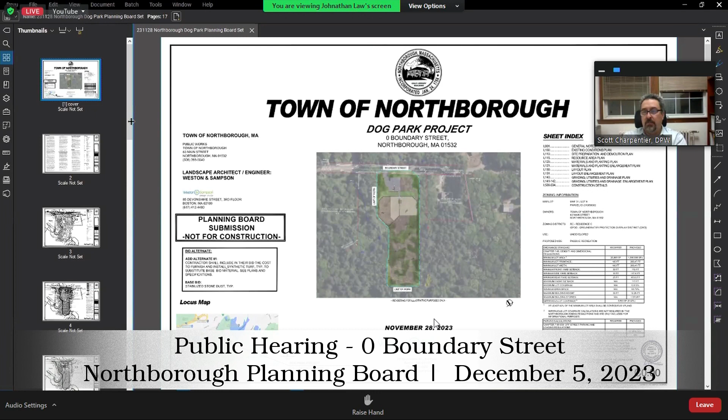I'm Scott Charpentier, Public Works Director, Northborough. We have a proposed dog park project that's being funded through the Community Preservation Act funds. The dog park location is on Boundary Street. The street is actually owned by Marlboro, but the property itself is located in the town of Northborough and owned by the town of Northborough.

If you drive down Hudson Street and take a right onto Boundary Street, just as you're approaching the Marlboro wastewater treatment plant, on the right-hand side there is a walking trail with a dirt parking lot that people use. Just past that on the right is the location of the dog park. If you see a duplex beyond that, you've gone too far.

We did a siting analysis about a year and a half ago, looking at different locations in and around town. This was decided upon as the preferred location through a public input process. At that point, we engaged Weston and Sampson to move forward with site analysis and design services. The dog park has been submitted to the Stanton Foundation for grant funding consideration. There are certain criteria in that grant program—Lori's more familiar with it than I am, having successfully been awarded that grant in the past.

Some of those components are that there is water available for the dogs, it's ADA accessible, and there are large and small dog areas among other requirements. So this project has large dog and small dog areas. There is a paved parking lot with 10 parking spaces, including a van accessible handicap space, and an overflow area that'll be gravel or millings, also used for snow storage.

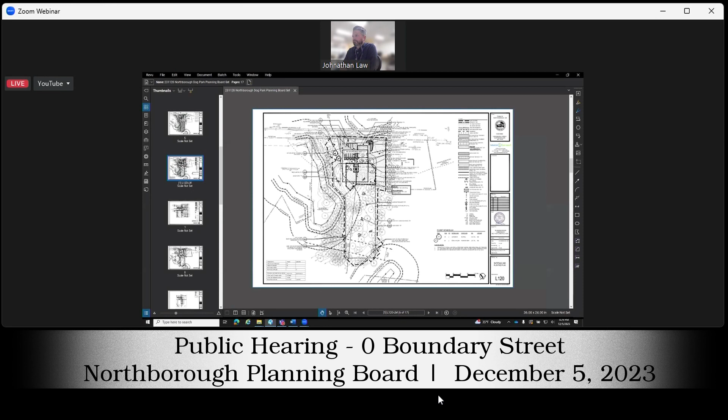Other questions? Hours of operation - I only saw hours for construction, but are there hours of operation for the park? I believe it's dawn to dusk for hours of use. So then there's no lighting or anything like that? No, there's no lighting.

And then, of course, with any park or area where there's no lighting, is there any issue? I guess the police - did the police chief submit anything about safety or concerns with after dark? I know when we did the town common, I think we had some concerns about lighting. Scott, you may remember that. What did we have to do for making sure there's safety in general? Anything at all?

When the rear parcel was donated by the family to the town common, one of the police chief's comments was to make sure there's a clear line of sight to the back portion of the lot, so when they're doing their rounds there aren't any corners for people to hide in. All of our facilities are dawn to dusk. I'm pretty sure Northborough PD currently does not have Boundary Street in their patrol. Once this facility is up and operational, it will certainly become part of their patrol, and my guess is that parking lot will be their turnaround - they'll come down Hudson Boundary, turn around that parking lot, spread their headlights, and go back into town.

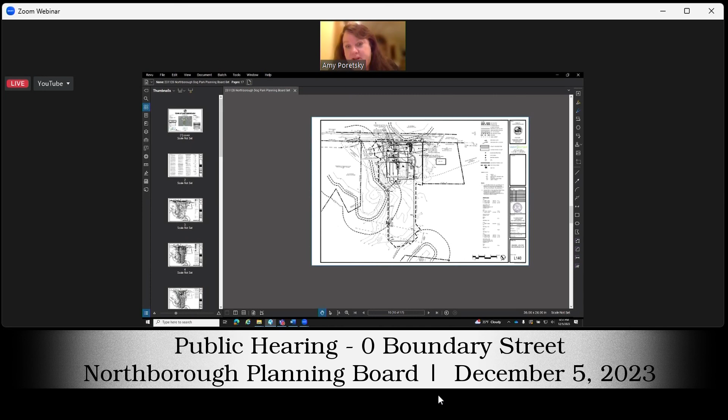So in that case, we would have conditions. There is a draft decision. Well, Kerri, you might want to open it for public comment. I'm sorry, yes, this is a public hearing and I would welcome public comments at this time. If you would like to make a comment, you can raise your hand and I'll bring you in to talk, or if you're on your phone, it's star 9 to speak.

The first one I have here is Cindy. If you could just say your name and address, please. Hi Cindy, can you hear me? Yes, we can. Just your name and address for the minutes. Sure, my name is Cindy and I'm at 186 Boundary Street.

So my question, well, the first comment I would make is I've lived here for over 20 years now on this road, and one of the really nice things is the wildlife we have. We do have a high water table, salamanders, and all kinds of really cool frogs and lady slippers. So this has been my big concern about this coming in and losing that or compromising that.

So I've been hearing with the synthetic turf containing the forever chemicals, the PFAS, polyfluoroalkyls, and they're cancer causing. So there's a concern about if the synthetic turf is used, what would be the risk of contamination if it were to contain that?

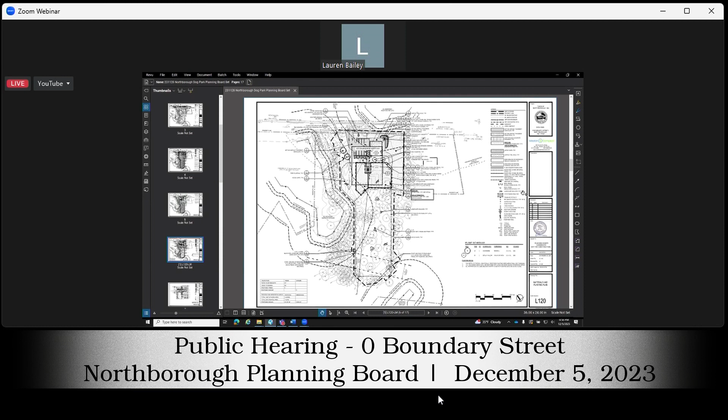Great, thanks for your comments. Okay, other comments or questions from the audience? Okay, I don't see any other hands at this time. Based on those questions or comments, any additional questions or comments from board members or staff?

Okay, we currently have draft conditions. Has the applicant seen the draft conditions? Lori, or do you want to go through them? I can't remember if I sent them to you, Scott. I haven't seen them, I saw your comment letter, we went over that with the updated drawings, but I have not seen the draft conditions. Okay, would you like to go take a look at them together?

I can go through those quickly if you'd like. Sure, that'd be great. So the first one has to do with compliance with rules, regulations, codes, and the need to obtain all necessary permits and approvals. Some of these are standard conditions that every project has. I've seen all the standard conditions on several past projects. If there are special conditions that have been added, maybe that'll move things along for the board for the next agenda item, if it's okay with the chair.

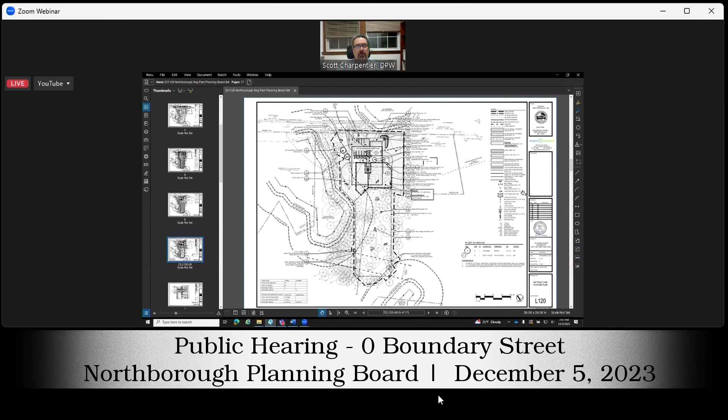Okay, great. So are there any questions or further comments about the proposed conditions or other conditions for consideration? One quick question, is the sign going to match the picture so it will look like all the other signs in town? Okay, yes, okay.

And I think you submitted the Ellsworth Park sign as a sample for that. That was what we used as a basis for the Welcome to Northborough sign, with a slight modification. The Ellsworth sign is our standard sign. We have the same at the Memorial.

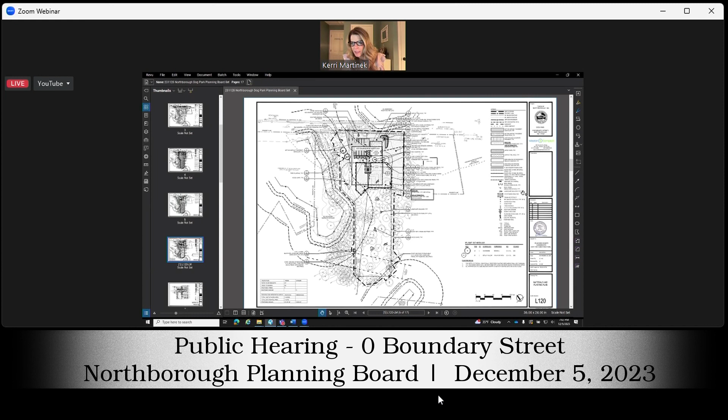Looks nice. Thank you. Okay, any other comments or questions on this one? No further comments from the public, it looks like. So with that, is there a motion to close the public hearing?

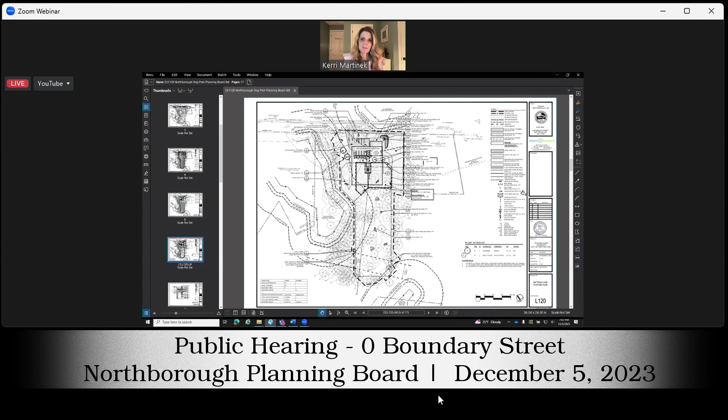So moved. Second. Okay, all in favor: Amy, aye. Bill, aye. Anthony, aye. Billy, aye. Carries unanimously. Is there a motion to waive the application fee?

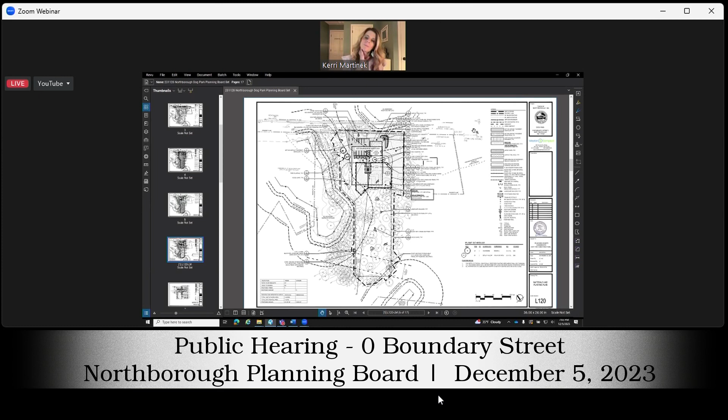So moved. Second. All in favor: Bill, aye. Amy, aye. Anthony, aye. Billy, aye. Carries an aye. Motion to waive planning board rules and regs section 7.2 D1A, the requirement to submit a locus plan at the scale of 1 inch = 100 feet.

The submitted locus plan is at the scale of 1 inch = 500 feet. So moved. Second. All in favor: Bill, aye. Amy, aye. Anthony, aye. Billy, aye.

Carries an aye. Motion to waive planning board rules and regs section 7.2 D1A, the requirement to submit a detailed traffic impact analysis. So moved. Second. Okay, all in favor: Bill, aye. Amy, aye. Anthony, aye. Billy, aye. Carries an aye.

Okay, so this is for site plan approval. Does the board want to go down the criteria for site plan to make sure we cover everything? Why don't we do that for the record, as we do with all of our projects. Okay, criteria for a site plan.

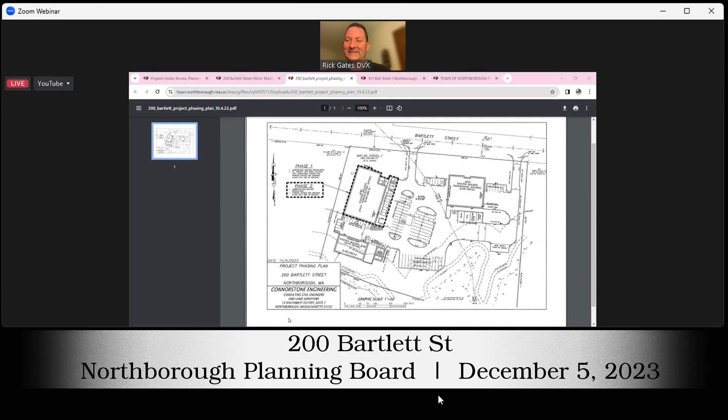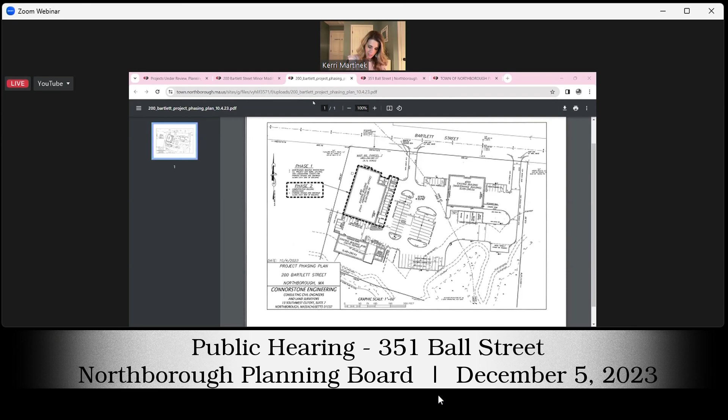Okay, next on the agenda we have the public hearing for 351 Ball Street, which is a public hearing site plan approval application for a wireless co-location for Boylston Emergency Equipment. Earlier in the meeting, I read into record the public hearing notice for this application, so that is in the record.

And with that, who from the audience would be representing that tonight? There are several John Vittums. Oh yes, so there's one, that's gonna be the team. Oh okay, let's see, and Megan Youngbar. All right, we'll just assume they're all on the team, we'll have to figure out who the real John Vittum is. And Megan, you said? Oh, we already have Megan. Yeah, she's— okay.

I think we just have about two more Johns to come in. And if there's a Kimberly Perlingy, she's on our team as well. Oh great, yep, I see her there. Thank you. There we go. All right, we have a whole bunch of John Vittums in the audience still. And actually just a John, I wonder, bring him in. All right, if you raise your hand, you're in danger of coming into this meeting, so be careful.

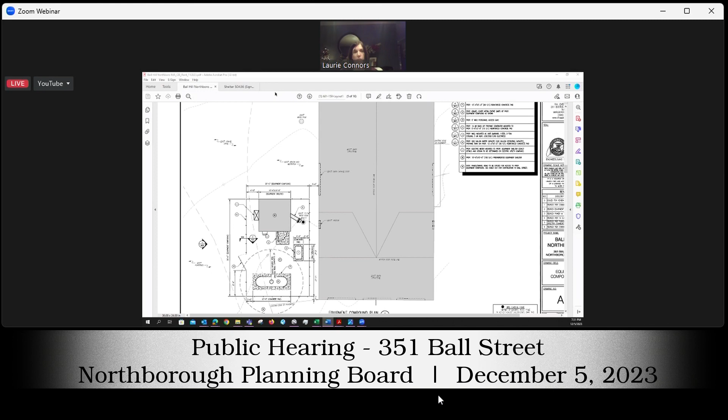Amy, you have a question. I have a question. Do abutters need to be notified for cell towers or communication towers? They were notified. We notified everybody within 300 feet. Okay, I just didn't see that.

My question, I don't know if the engineers know, is, well, it looks pretty far - how many feet from the pole to the nearest house? It's over 72 feet, I'm sure. It looks pretty far. I'm just thinking, they always ask if it ever fell. It doesn't look like it's going to hit any houses except for what's in the area of the pole, and nobody lives on that site, I don't think.

This is John with Green Mountain Communications. The existing farmhouse that the Davidians own on the property, this structure is out back and it's approximately 75 to 80 feet from the structure. So if it was to crumble and fall, it will not hit that building, which has been there for years. We don't foresee that happening, but we can't prevent a natural disaster. The abutters on the street were well within fall distance of that. So if that helps explain it.

So you're pretty sure that the pole is at least 75 feet away from the house? Is there someone that lives in that house? No, the house is currently abandoned. They have it for storage, so no one lives there currently.

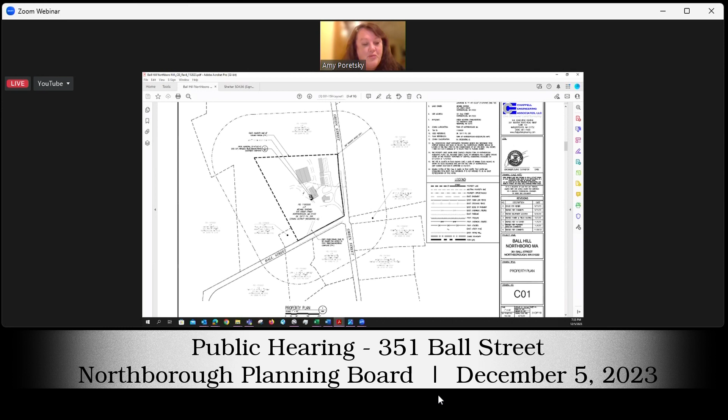I'm not sure if we should get rid of the barbed wire. I know we don't want barbed wire because of the look, but I think for cell equipment with the cell towers, don't you need the barbed wire to keep people out, or not really, Laurie?

I've been involved with cell tower projects that did not include barbed wire. I mean, we could take it out. I think the one at Kearney Park has it though. Maybe because there's so many people.

Another alternative is the mini mesh, which will make it difficult to climb up the chain link fence. Maybe that would be better. No one could climb it, because it is an area where there are a lot of kids near the apple orchard, but they shouldn't be that far away. But I don't know, it'd be good to keep people out just in case.

I thought I saw a hand up. Maybe you took it down. John, did you have something for that one?

Yeah, my only comment, speaking for Boylston, is this is public safety. That's the only reason why we put the barbed wire in this, because of the public safety equipment that's going to be housed within the unit. Obviously it's sensitive and proprietary information that they have, but we don't want any particular individuals to break into the shelter to hack into their systems. So my recommendation would be that the barbed wire stays, as it enhances the security for the shelter. But that's just my 2 cents.

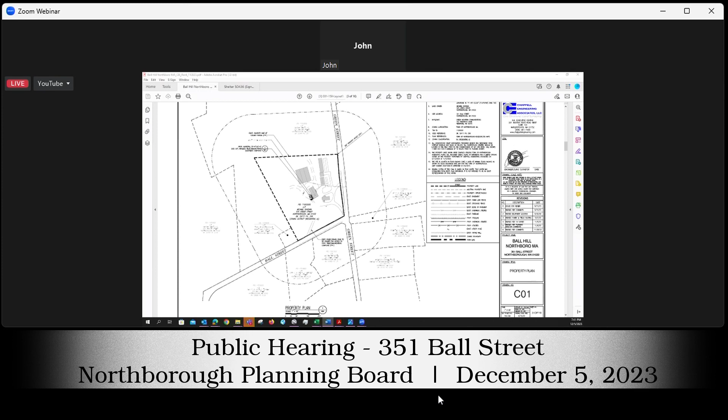This compound will be weed mat and stone, with proper drainage so it can filtrate — it'll be clean when we're done. We're just doing basic scrub cleanup on the subsurface grade.

Amy, you have a question about that? Yeah, not really about that — but other cell towers we have in town where they put in the fencing and slats, we've had arborvitaes around it so it kind of makes it blend. This is a whole farm area and people drive by with buggies, so I didn't know if it would make sense to have some arborvitaes around the area.

We can take care of that if you need it done. We can put some in, 5-6 feet or whatever, so it complements and helps the look of it. If the board approves that, then yeah, we can definitely do that for you. It helps it blend so it doesn't stick out like a sore thumb. Yeah, no, we're good with it — we can definitely make that happen.

Okay, so any board thoughts on that? Does that sound like something the board would want to see? Yeah, I think it also helps with some of the security, just hiding it there — it doesn't stick out and draw attention.

Okay, so Laurie, it sounds like we need a condition for the arborvitaes. Do we also need a condition about not uprooting the trees, or not necessarily? Question about the arborvitae condition — are you interested in only having it planted on the two sides visible from Ball Street? I would say so, I don't know how... yeah, yeah, so yep.